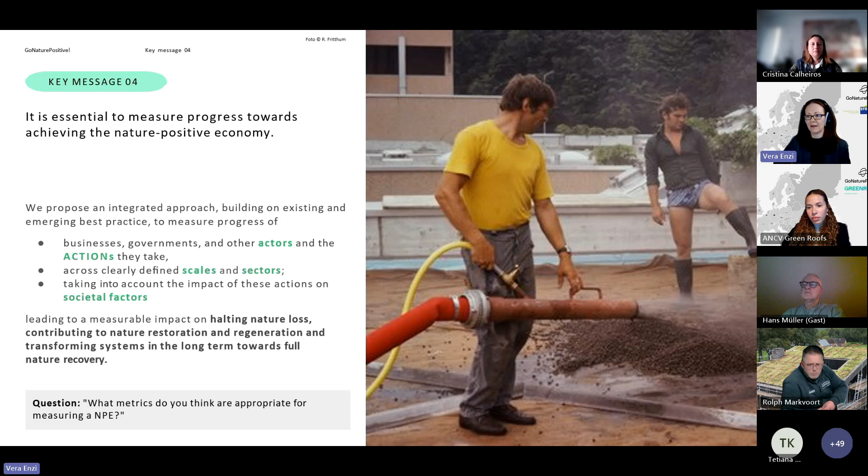So here we would be asking you, what metrics do you think are appropriate for measuring a nature positive economy? Because maybe you also have some further ideas on how metrics could be designed. What we came to basically was that, of course, measures and their progress can be looked at from a top-down scanning of metrics and nature positiveness of the economy, but can be also measured by a bottom-up interpretation of nature positiveness and useful metrics. So we are proposing that both ways are necessary.

Yes, some examples how that actually could work. So most of you will be familiar with the SDGs and also, for example, the Task Force on Nature-related Financial Disclosures, maybe also the donut economy concept. What the nature positive economy concept we are proposing distinguishes itself from the mentioned examples in that we are proposing a whole of society approach, not just a sectoral or limited action in scale or actors.

So last but not least, the last key message about the whole of society approach. A nature positive economy will require legislation to stop environmentally harmful activity and support nature positive actions, alongside voluntary and citizen-led initiatives. It will, of course, respect international human rights, and it will support equity, fairness, and justice. And here also comes a spotlight to the fact that net nature positive means that there are certain parts of nature that would potentially be lost, and there are certain nature negative actions that may be acceptable. The question is how to decide what's acceptable.

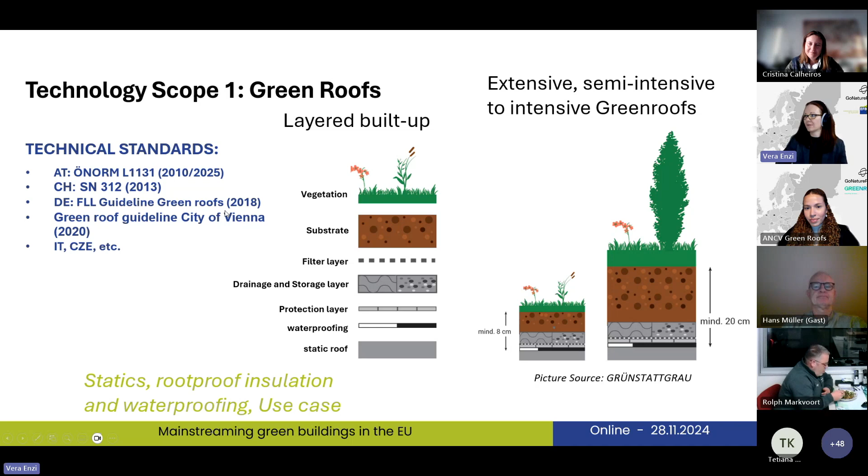So how do these kinds of green roofs look like? I don't know how many green roof experts are actually present today - I hope a lot. So we can also see some recent developments. We've come together with the energy demand and solar side a lot; this is, I would say, one of the fastest developing markets we're currently seeing. You see an extensive combination on the left side of the slide and an intensive combination on the right side.

Technology scope number 2, forms of green walls. Actually, we don't find as many standards in green walls nowadays than we do on the roof side.

In Austria, there is actually a green wall standard as well. It was published in 2021. It's the ÖNORM L 1136. It was just translated into English, so it should be available within the next 2 months.

We also find the German FLL guideline for the respective sector being used in a lot of different countries, and a lot of city-specific or even regional to local guidelines across the whole of Europe.

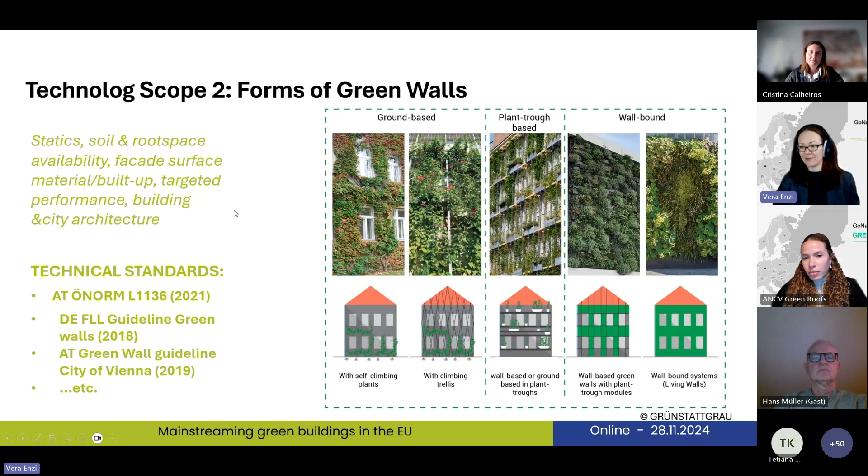Of course, projects are also bound to a lot of on-site conditions - static, soil and root space availability, facade surface materials, build-ups, targeted performance, city architecture, etc. Because normally facades are very visible in the middle of the street, so they must not just fit to the building, but also fit to the streetscape and to the overall goals.

That's actually a nice picture of a living wall system. In that case, it's a modular one, and can even be planted with self-seeding plants. So this technology is developing very fast over the past few years, with a lot of different systems available on the market.

This is a picture from a hotel renovation. Actually, it's a zero emission building, and it works mainly with self-climbing plants. And if you look into that picture, you will also recognize that you need very good regulations or guidance on necessary maintenance plans.

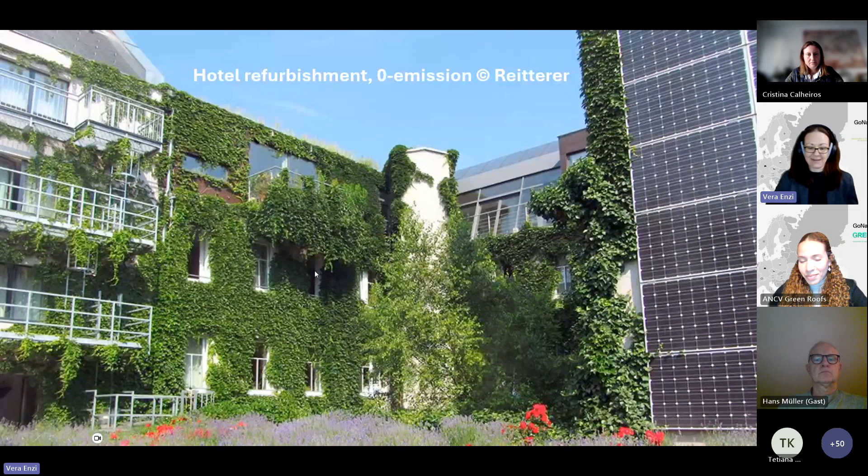So the story is that around 2014-15, in the European Federation, we started promoting market research and market reporting activities. There is quite a nice approach and method existing on how national markets can be evaluated, and so far over 10 market reports have already been collected.

Apart from one, all of them are publicly accessible - you just place your email address and you get the document. They are very different in size and content, but still they offer really interesting insight into the different specific markets in Europe, and about the players and the different policies in place from the national scope.

What I also wanted to mention, something that influences our market currently very strongly, is that we find a lot of suitable directives and policies from a European Commission perspective. For example, the European Energy Performance of Buildings Directive, which led on a national scale to green roofs and green walls being implemented in the system of energy certification for buildings, also renovation passports, thinking of the current ongoing process of pushing forward the renovation wave, also with European Commission support in relation to the initiative of the European Bauhaus in terms of quality, good projects for people, buildings, and biodiversity.

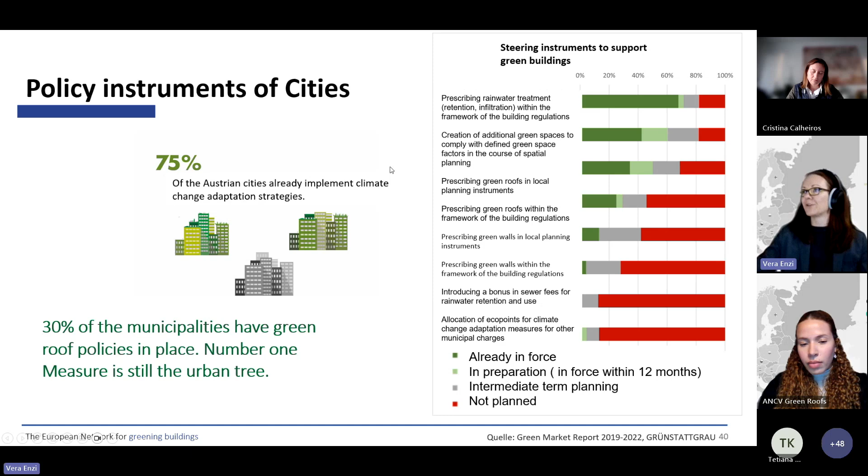Prescribing green roofs and green walls in local planning instruments, building regulations and building plans is also a measure taken quite often. But we also see some measures that are still quite new to the Austrian market, like introducing a bonus for sewer fees for rainwater retention and use, or the allocation of eco-points for climate change adaptation measures for other municipal charges. These would be two examples of steering instruments not yet used in Austria, but we can already see some in preparation, so in the next 12 months we may see some first developments.

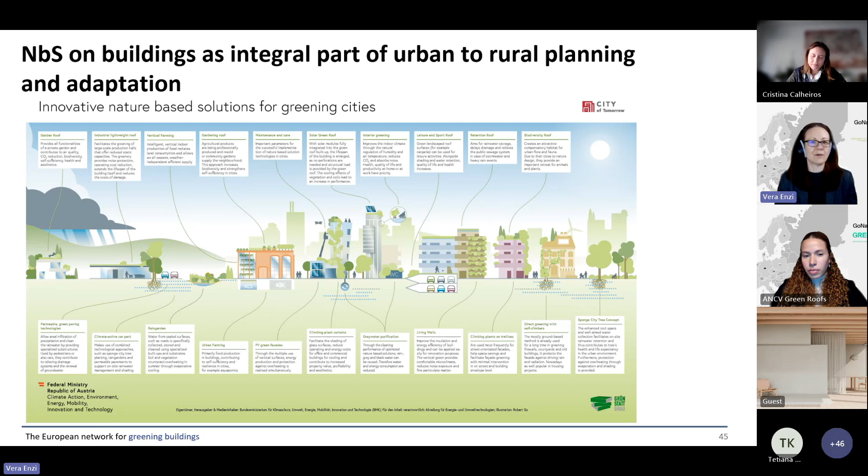And the sponge city tree concepts, for example, get more and more integrated into our technologies. Of course, a green roof is one of the solutions of a sponge city concept.

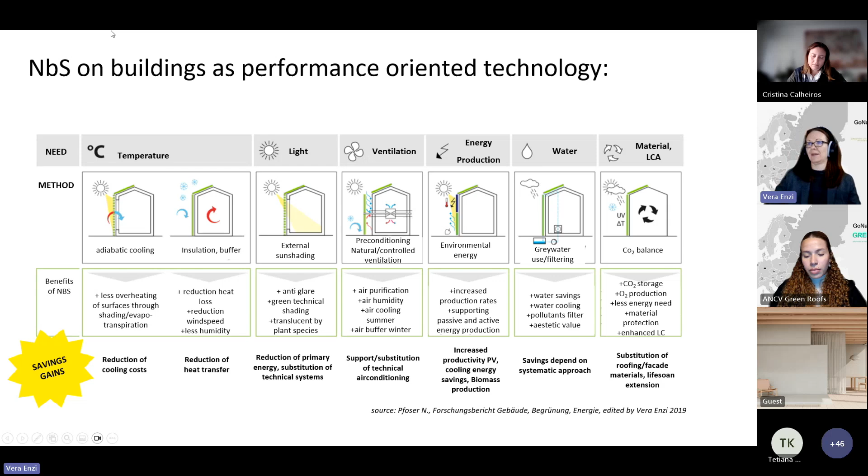What we have learned really well is that nature-based solutions on buildings are a performance-oriented technology, and we can very well tailor our project to the need of the building. So temperature, light, ventilation, energy production, water, material, even life cycle analysis and carbon balance are already a topic in the industry. We know that we can create savings and gains for our customers with that. We're actually getting better and better at selling and implementing our technology in relation to the performance a certain building would need. But not just this aspect - this aspect is really important if you want to explain and do a good project for an investor.

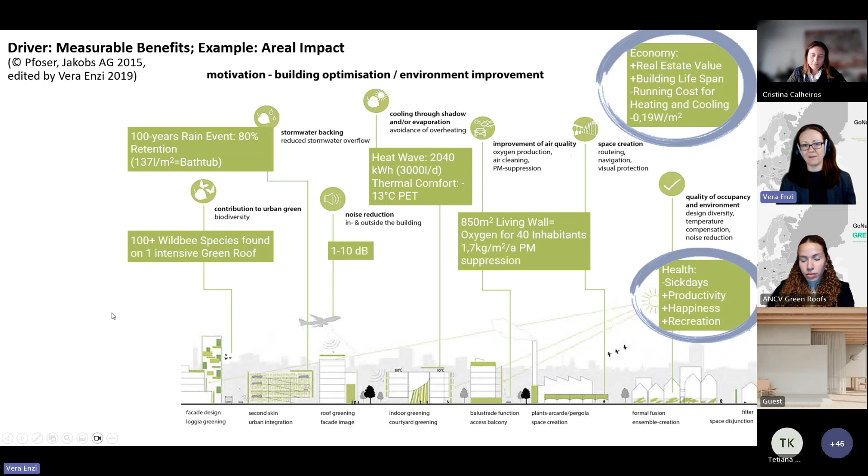But I think what should be also even more on the agenda, and it actually is if you're looking into the many cities, is contribution to urban green, stormwater backing, noise reduction, cooling through shadow and evaporation, improvement of air quality, space creation, quality of occupancy and also the environment. So a lot of nature-based solutions benefits and co-benefits that we can have from implementing, and our industry is adopting to that.

I'm already a bit late in time. Maybe we are going to shift our look at Mentimeter a bit to the back once I can check what you have answered. But at this very point in the webinar, I'm going to make you aware that we have the fourth question on Mentimeter already active for you, which is, what other nature positive use cases in our industry can you spot? Because just in time, it's about 6 o'clock, we are now changing to some nature positive use cases that the team from the EFB and also ANCV has identified in the project.

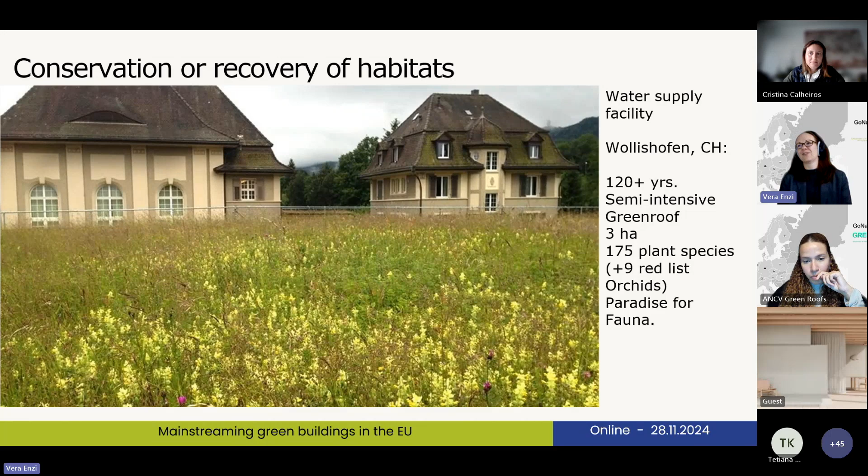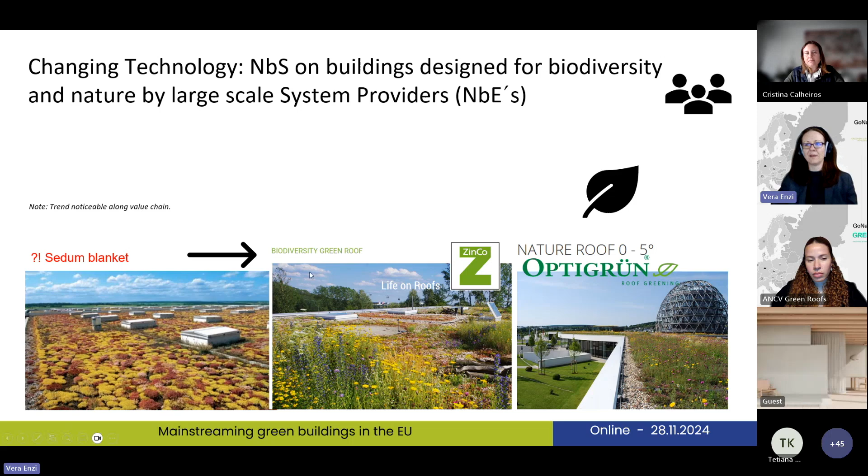A second trend or hint of nature positive I've seen when looking into our industry: we all know that we have some nature-based enterprises that also provide technology or systems for green roofs and green walls. I think green roofs got more industrialized in the 1980s. The picture was more like a sedum blanket vegetation, extensive green roof, for many years. But basically all system providers in the last 5 to 10 years have also changed their portfolio into also offering biodiversity green roofs, nature green roofs, that come along with a lot of different features for birds, for beetles, for bugs, for water retention, also in combination with solar. So I would say this is a nature positive development that our sector is having.

What we also see is a lot of interesting concepts that get somehow together with our sector. So what I took here as an example is Studio Animal Aided Design. Some of you may know them, if you don't, check them out. Basically, Animal Aided Design helps to get a city quarter or also a building proof for nature. It means that certain possibilities for different species in finding food, nesting, etc. are implemented in a proper way, so that a green roof and green wall in that sense can function as a full habitat.

Another example that I spotted for climate change adaptation and mitigation process is, for example, nature-based enterprise Greenpass from Vienna. Basically they are offering services related to the EU taxonomy directive, but also a software as a service approach for other planners, so they can assess buildings and city quarters in relation to performance, and also assess assets and portfolios in line with ESG and other regulations. I think that's quite a nature positive development too.

Thank you very much, Vera. I will start to share the PowerPoint. Thank you very much for the organization of this webinar, and thank you, Vera, for your nice presentation. That was really important to have that framework in order to understand also the project and what we're talking about in the end.

So I will talk a little bit about examples of natural materials. We are talking about nature positive, and these are some case studies that I'm going to share from Portugal. But before, I would like to highlight again the importance that part of being nature positive is also the materials that we use. We heard Vera talking about nature-based solutions and how they can be incorporated in the building, outside, on top, facades, inside the buildings, around the buildings, but also the materials are really important because it's not because we have plants or it's green that it is sustainable or ecological.

So to evaluate the life cycle assessment of the materials and really take care of that issue is really important. With that, I'm going to show a real case project that already finished, called Green Urban Living. That was based on looking for a material that could be used in the drainage layer. We saw Vera showing the layers of the green roofs, one of the layers is the drainage layer. So this project looked for a material, in this case cork, a cork-based material.

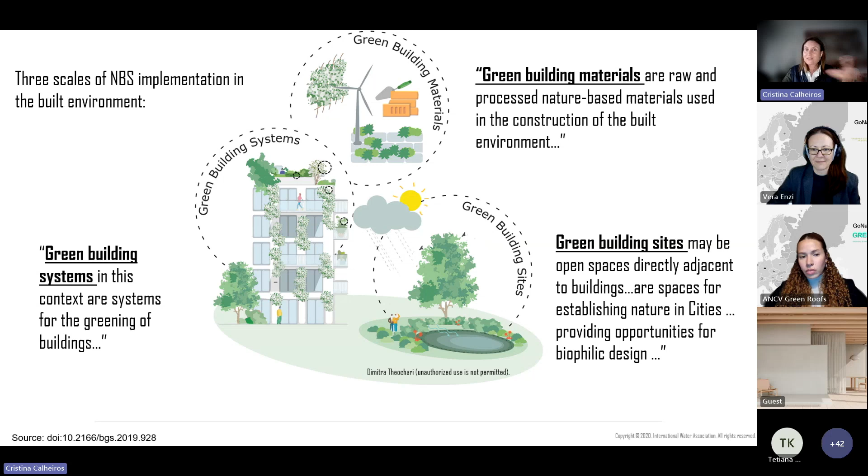So it's not just because it's green, it's sustainable - we have to go further and deeper on the materials. This is the project I was talking about, the Green Urban Living, that searched for a material to be used in the drainage layer. And this material was cork.

Cork is extracted from a tree, the oak tree. And it's very interesting because it has a high performance in terms of thermal, acoustic or noise reduction, drainage and retention functions, and also anti-vibration and insulation features.

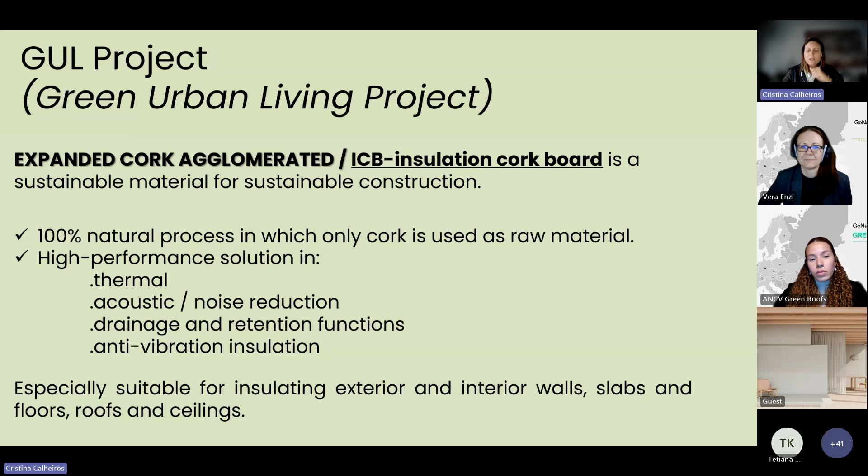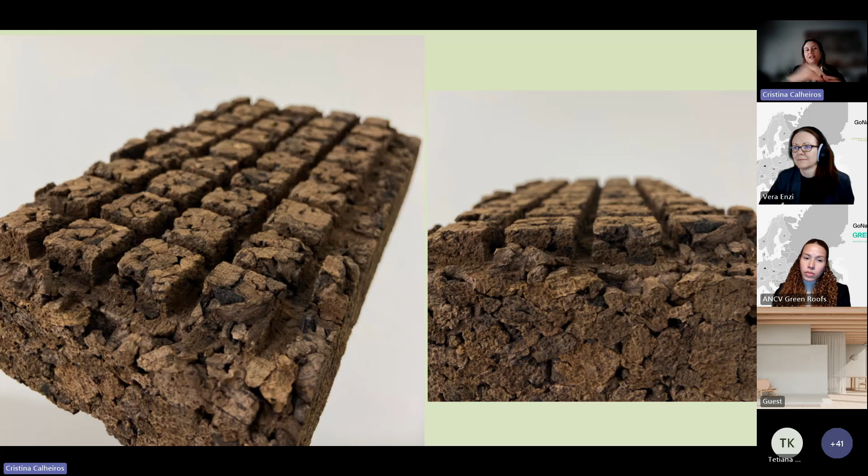And we can use cork as an agglomerate board. I'll show you - like this. The cork is extracted from the tree, we have an agglomerate, and then we can transform the agglomerate into this board. This one is the specific one used in green roofs because it has these stripes, these lines, where the water goes through.

So the question is: can we have the same performance on a green roof, or even better, using natural materials? That's what this project was about. It was co-supported by the European Union, and several companies were involved. The main objective was developing expanded cork agglomerate to be used as a drainage layer.

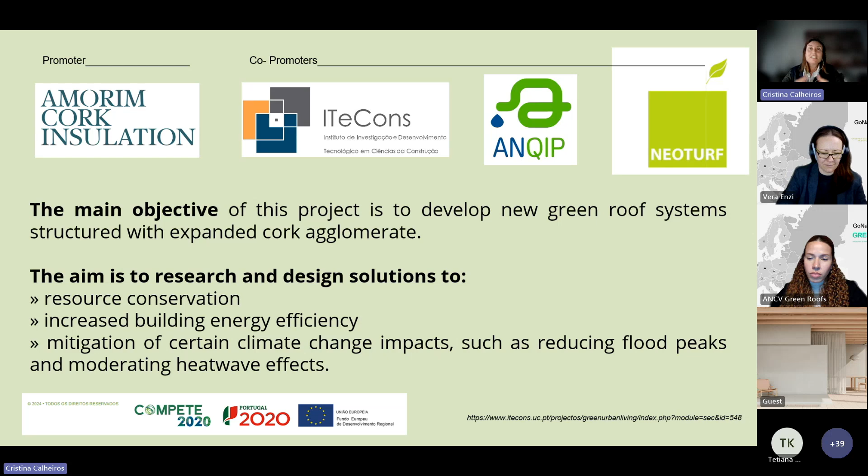We also wanted to highlight the importance of insulation, related to climate change impacts - when we have heat waves or a peak of precipitation, how this board could respond. And these are the trees.

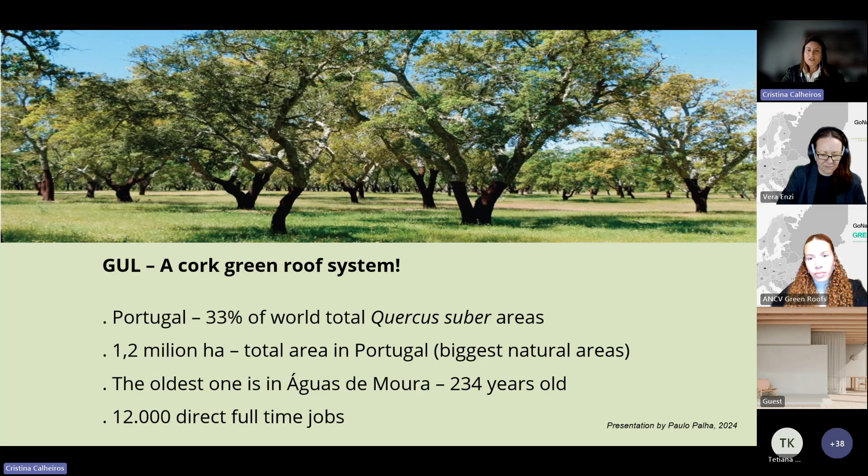If you don't know, it's the Quercus suber tree, and in Portugal it has a long history and prevalence because we have around 1.2 million hectares with these trees. It's also very important in terms of jobs, with around 12,000 people engaged in this process. There are other places in the world with Quercus suber, but in Portugal it's really representative.

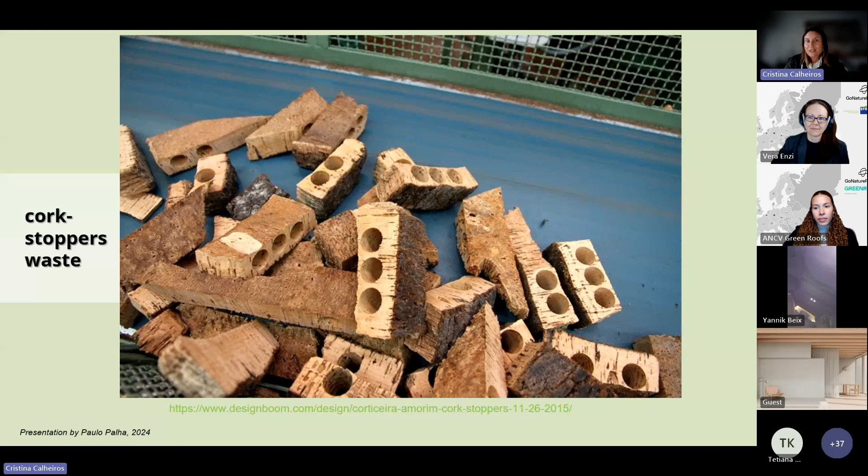Part of the extraction is used for cork stoppers, but it's also used a lot in construction. So I put it here, cork stoppers waste - but this is not waste, it's a subproduct, a very interesting material, because in the cork industry, everything is used, everything has value. Even the dust has value from the cork.

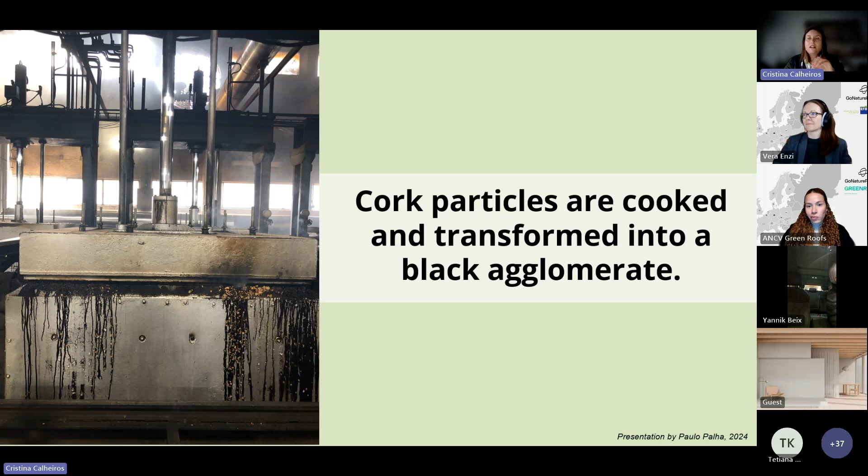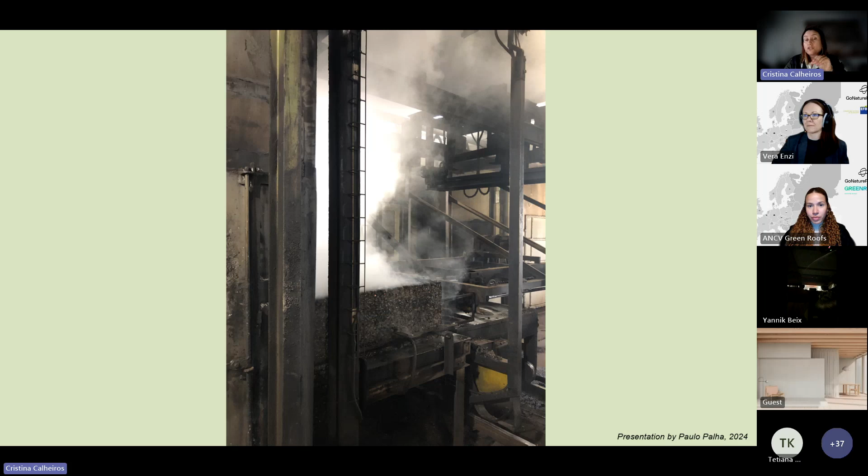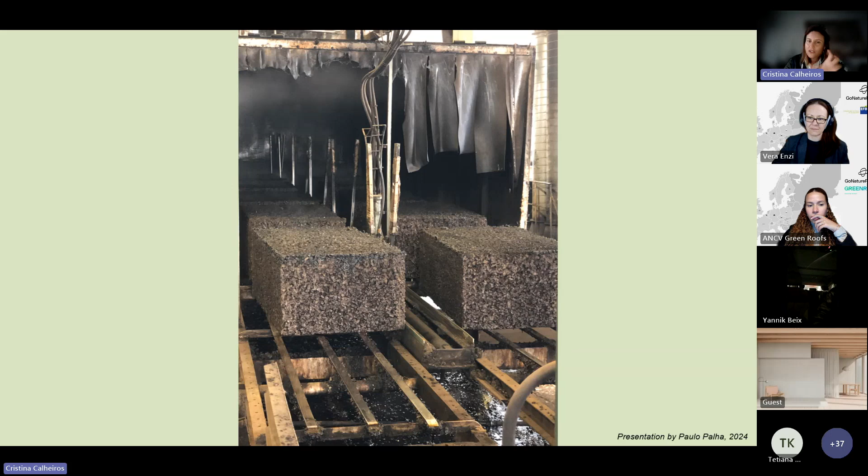This is the production site, the factory, where the cork particles are cooked and transformed into a black agglomerate, because they go into an oven and through high temperatures. What happens is this is what it looks like - we have the agglomerate that releases suberin, which is the natural glue, so they are all connected in a natural way. These are photos from the factory.

After this production, those lines we saw before are made, and we can have different dimensions of the cork board. As I said, in the schematic representation we have the plants, the technical substrate, filter layer, and then the cork board - the ICB, also called insulation cork board, that's the same thing - and then the slab. This is interesting because, as you see on the right side, you also have different shapes.

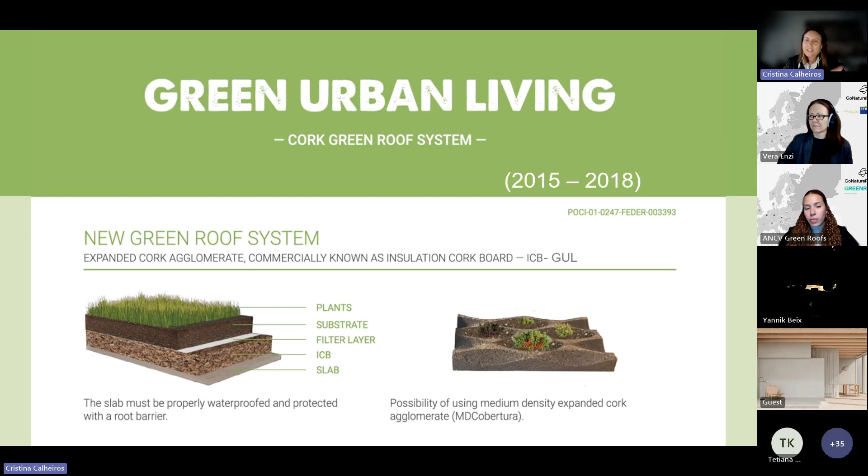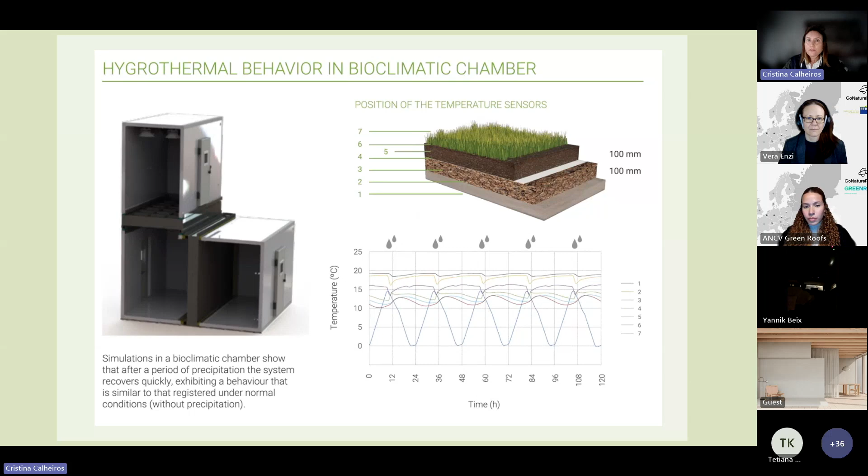I'll go through this very briefly, but just so you know, a lot of scientific papers have already been published related to hygrothermal behavior. You can look, and if you want, you can ask us and we will provide them. All of this has been under research.

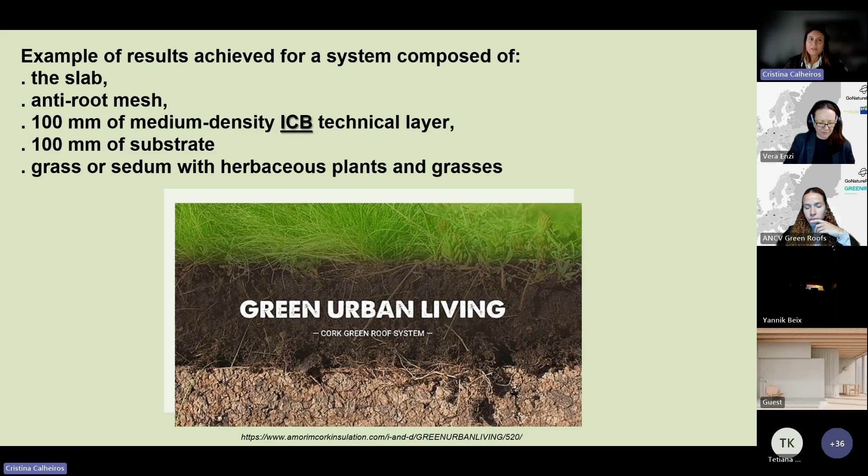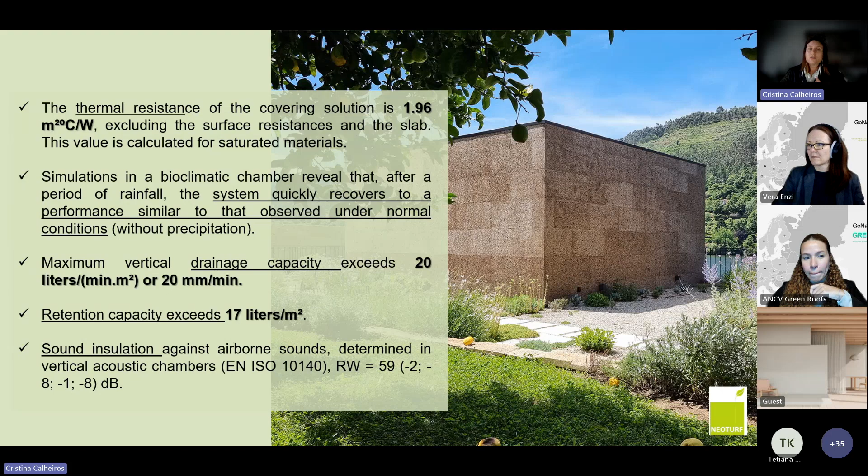There was this standard roof with the board - 10 centimeters of this cork board, 10 centimeters of substrate, and then herbaceous plants on top. Several tests were made concerning retention capacity, in this case 17 liters per square meter, which is very good. Sound insulation was also evaluated, and thermal resistance and acoustics were also looked into. We don't have much time to go deeper, but we can provide these studies, as I said.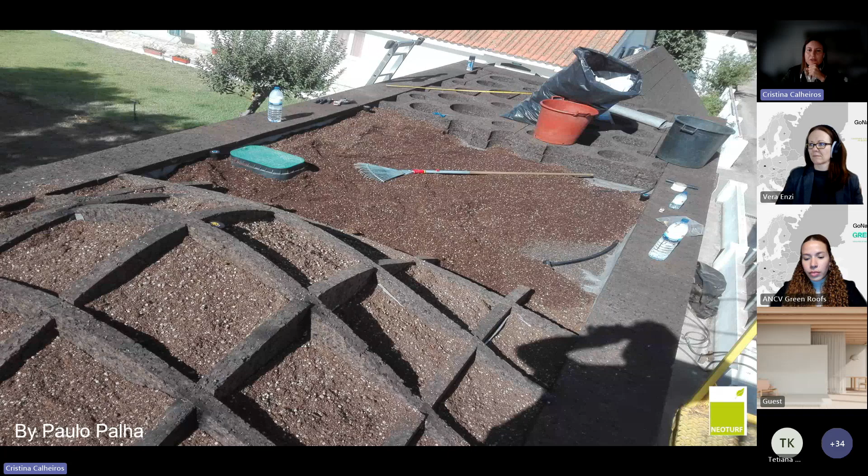So here you can see how the implementation can be done in a real green roof. You have these boards that are all connected, put after the slab, and then after this we have the filter, the substrate and the plants. This is another view of a different green roof showing the different stages of implementation, and here with the covering of plants - as you see, it's very interesting in terms of landscape integration.

So this was the development of the material, the drainage layer. And I will give two examples of the application. One is in a municipal building, that this building is now converted into a living lab.

So here you can see the building from above. And this was the implementation, an intensive green roof where you can walk through it. It was very important for the municipality because they can now do visits, and they also have a vertical green wall.

Some highlights: this green roof has different heights of the substrate, varying between 15 centimeters and 30 centimeters, because we have different plant types. We have smaller plants, but also bushes, so we need more substrate in some parts. But as you see, it's a very diverse and interesting green roof that has this system, the cork board.

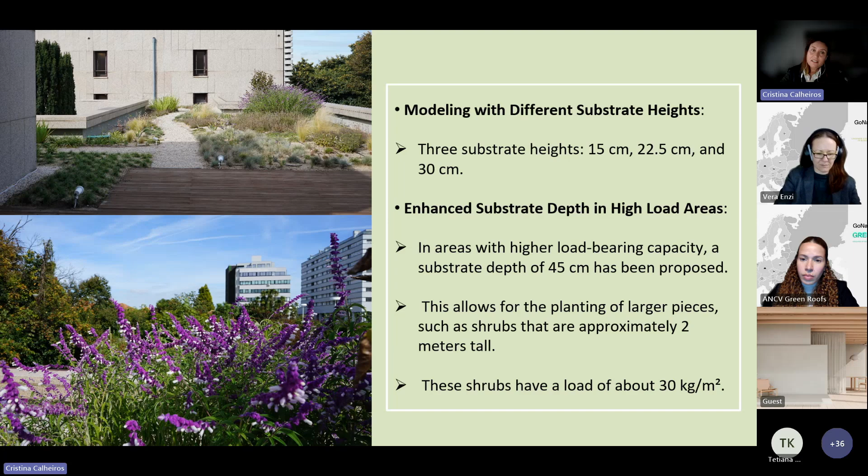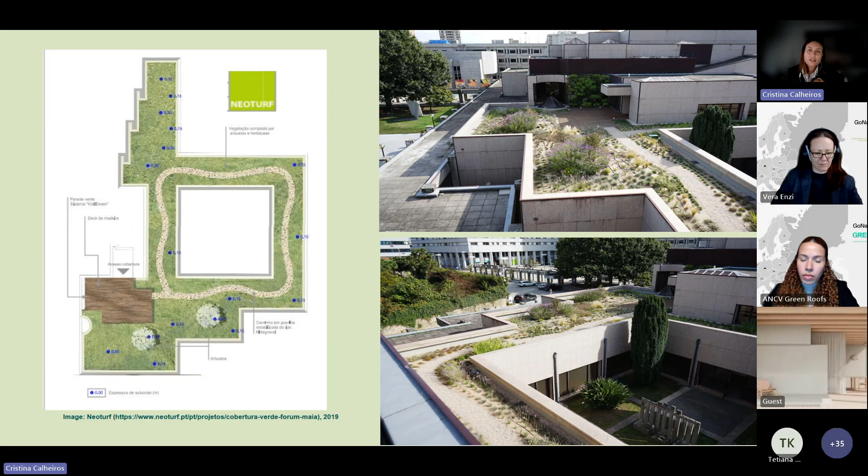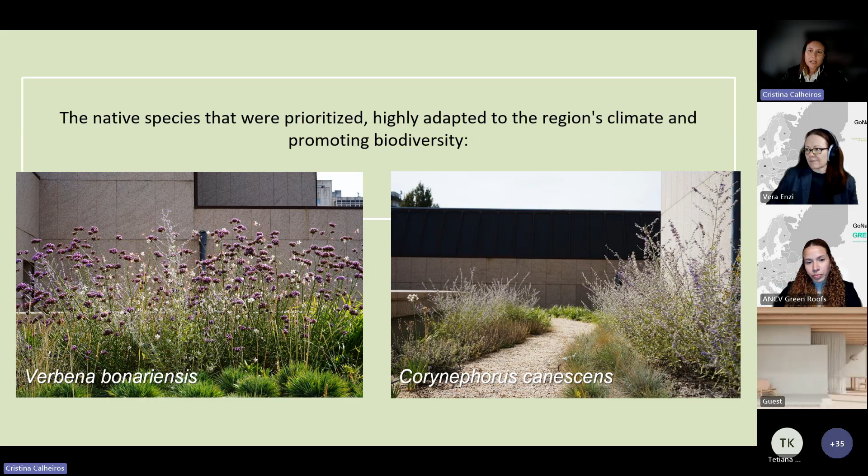So this is the plan. Not all the building was covered with the green roof, but that is the intention of the municipality for the next stage. So these are some of the plants that were considered, local plants adapted to the climate with low maintenance. That is also very important.

Here you see the irrigation system. This green roof is low intensive in terms of water management, because the irrigation system needs to be there, but it was only used in the setup phase, in the initial phase, and then when necessary, in extreme events, when it's very hot. Otherwise, the water keeps to a minimum, and that is why it is also a sustainable system.

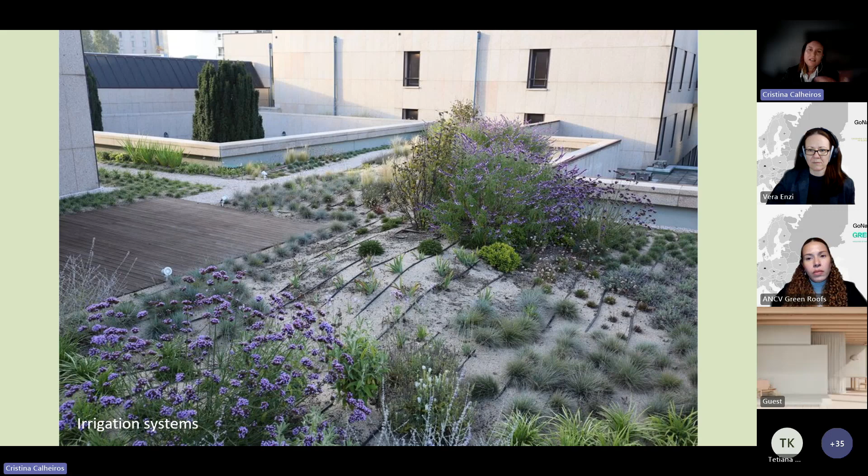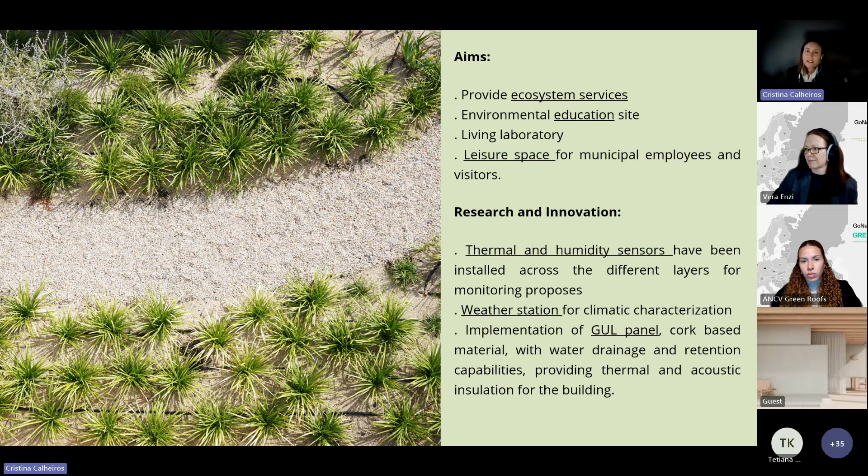And now it keeps on this research related to the thermal and humidity sensors. So we are monitoring some parameters, abiotic parameters, and also a weather station. As you see, these are some other photos, and I will share this video with you.

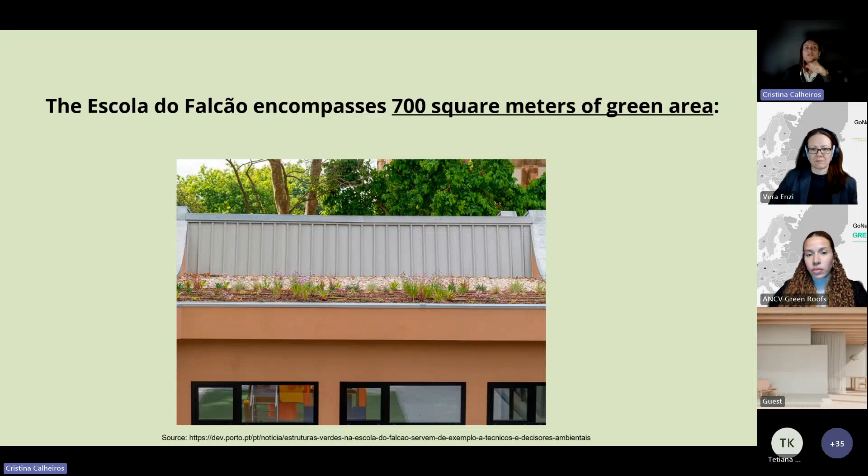The other case study is also a municipal building. It's a school, and it was retrofitted in 2023. So it's around 700 square meters of green area, and it was very interesting because the main aim was to promote thermal comfort for the students and the staff, improve energy efficiency inside the building, and promote local biodiversity.

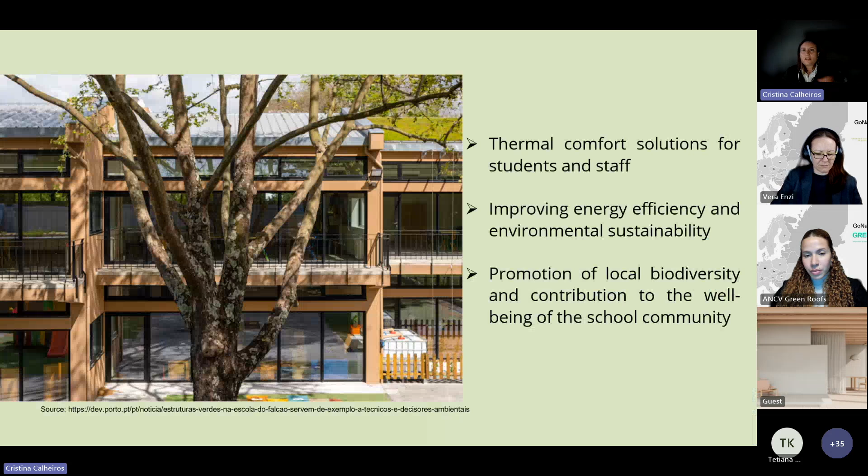And also integration in the building. This was, you can see on the right side, there's a green roof there with a slope. Another green roof is a biosolar roof, and here the aim was also to produce energy to be used in the school. So this was following all the technical guidelines, and it's already implementing and producing energy.

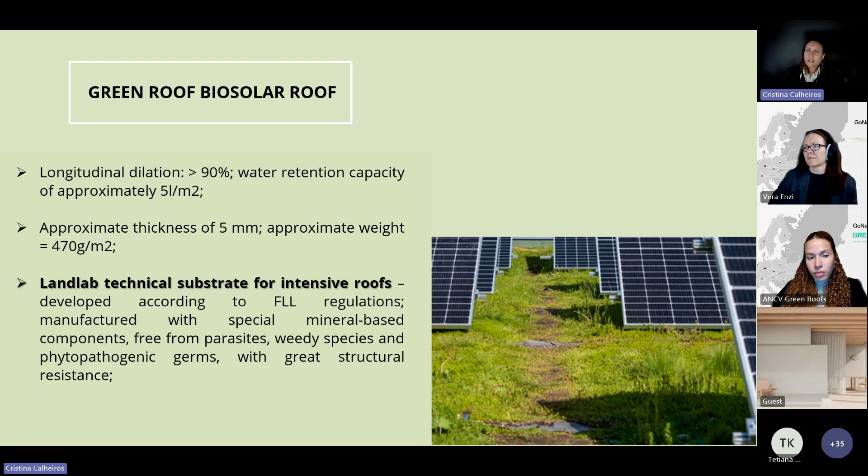These are some of the phases of the construction. And this is the other green roof, a complete horizontal green roof. And as you see, also the irrigation system. In this case, it was used also the GUL system of the cork, and several species were used mixed with a sedum carpet.

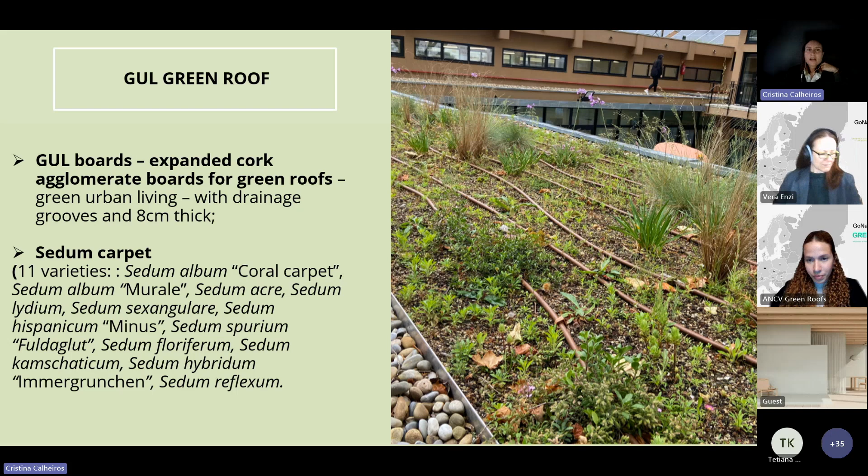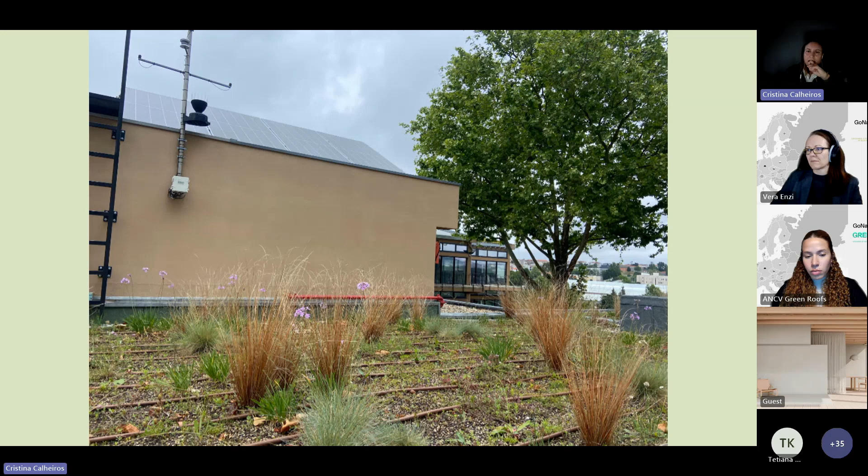So some highlights here. You can see here also on the left side the climatic station for monitoring. So in both case studies, we are monitoring some parameters. And then this one, we have a closer look at the sloped green roof.

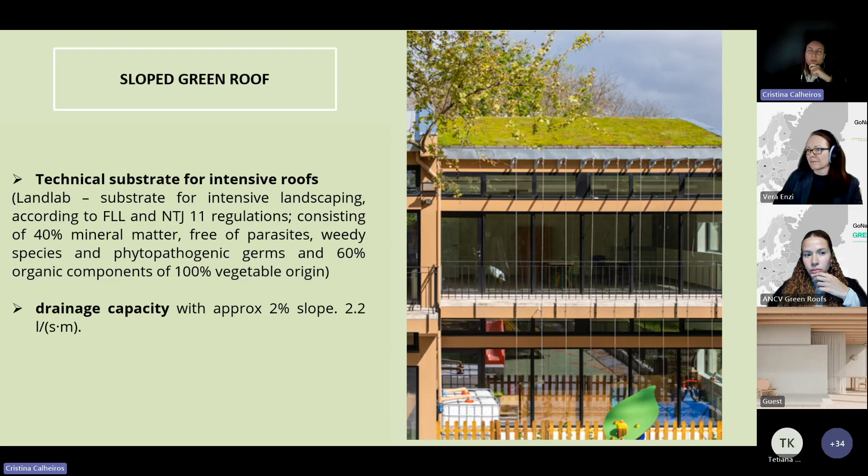We have sensors on the top of the green roofs and inside the building, because we are comparing the efficiency of a classroom with a green roof against a classroom with a conventional roof, with the same conditions. We hope to bring more results in the near future.

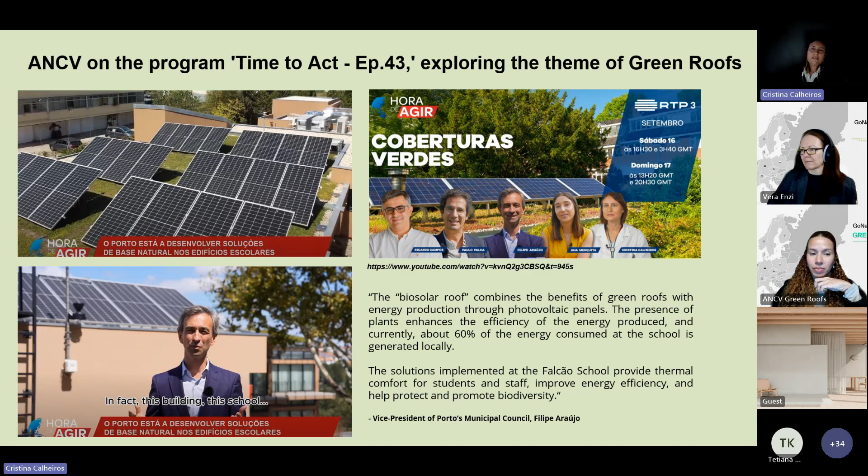So here is another, and this is very interesting because this has had huge attention. It caught huge attention from the media and from several programs, because this is leading by example, and for the municipalities, this is very important, because one is from the municipality of Maia and the other from the municipality of Porto. This is very important because it's leading by example, and the next step is to replicate these systems.

Let's see if I have sound in this one.

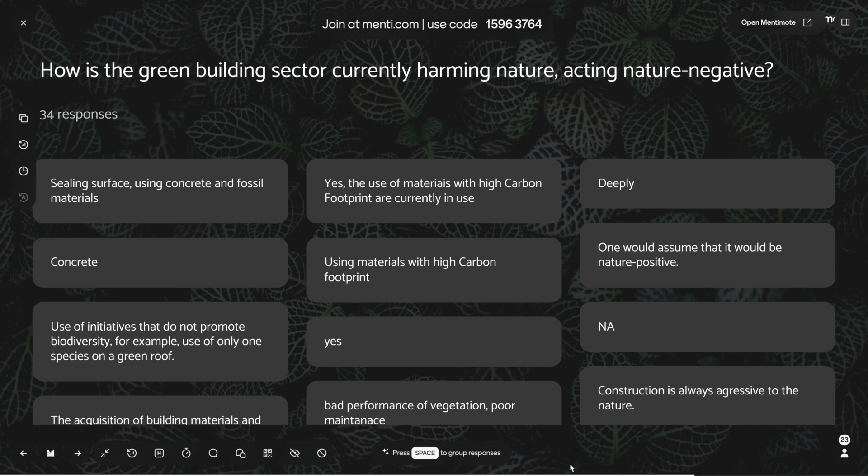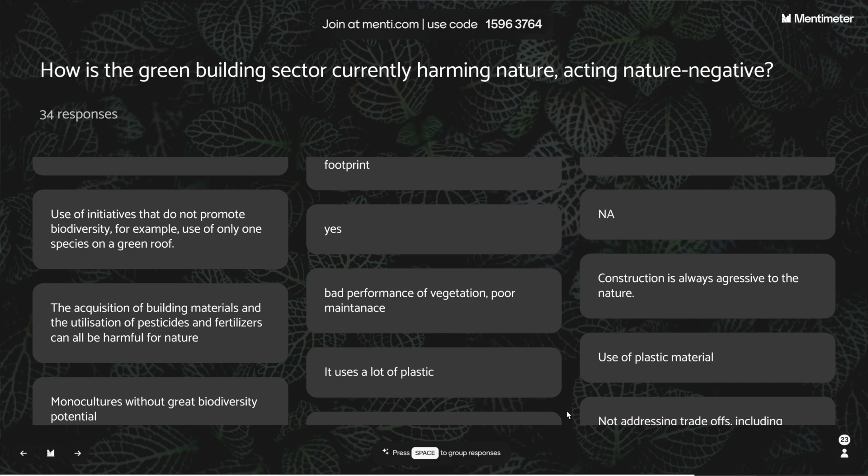The thing is, there are a lot of results. It's great, you gave us a lot of different hints. Some of them were, I think, also quite new for us. So we have to reflect, for example, on what materials we are currently using, what the carbon footprints are.

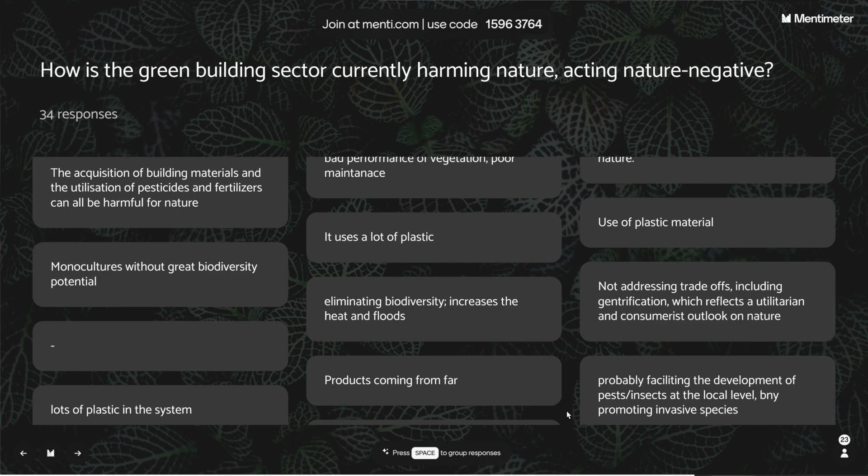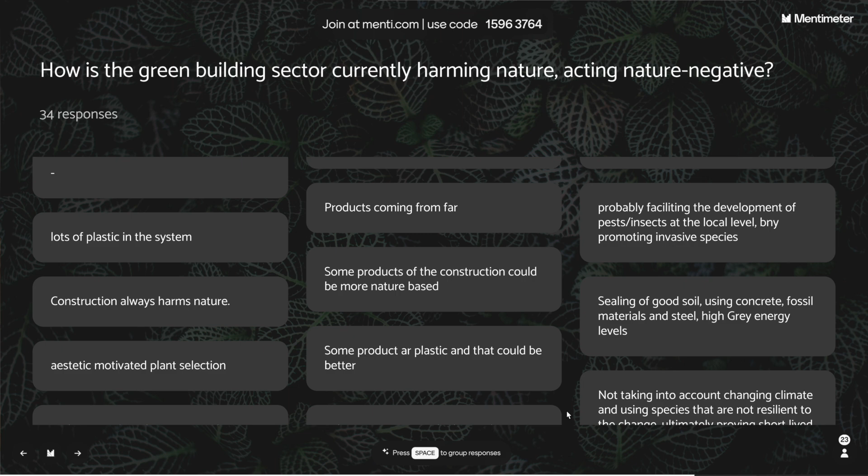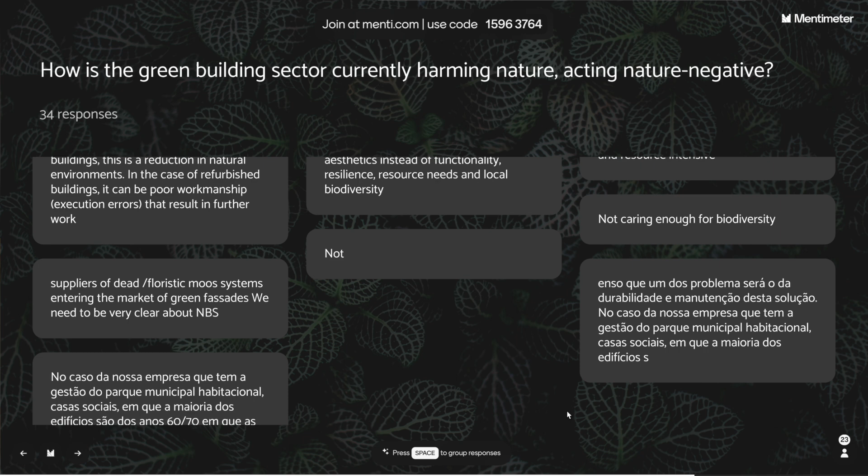Not just in the production of the material, but also in transportation carbon, for example. I think another part of the survey results is that building new buildings as a general habit always goes along with nature destruction and increase of land use. So really, for our whole market, pushing for the refurbishment market rather than new buildings being built is a really powerful and important nature positive move.

Of course, if we create bad performing projects in terms of vegetation, build-up, etc., that would be rather harming than acting nature positive. That's clear, so thanks a lot. If you're interested in the results of the survey, we are happy to share them with you afterwards. It was said today already that we are organizing today's webinar in cooperation with the Connecting Nature-Based Enterprises platform.